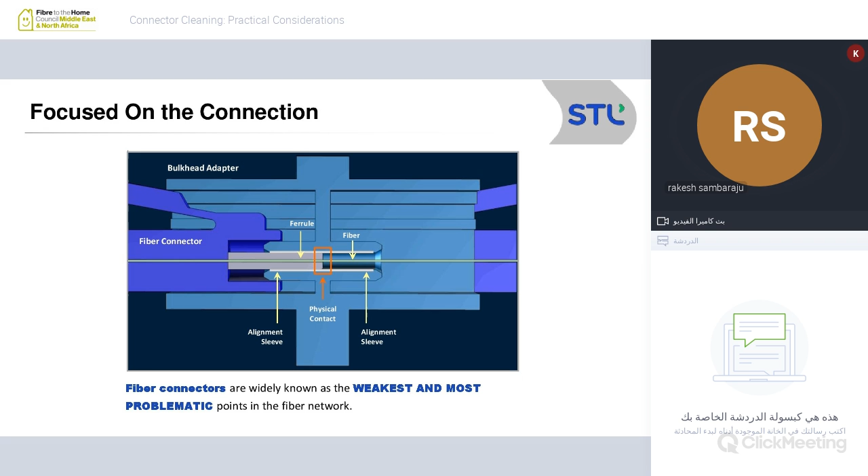The main component of the connector is the ferrule, which is what mates the other end of your connection point, right? So the ferrule is the tip of your fiber, and it mates into the connector, and that's where the physical contact between one fiber and the other fiber actually happens. Also, that is the weakest point in any fiber optic link, and it is very important that we make sure that particular physical contact is pristine and free of any contamination.

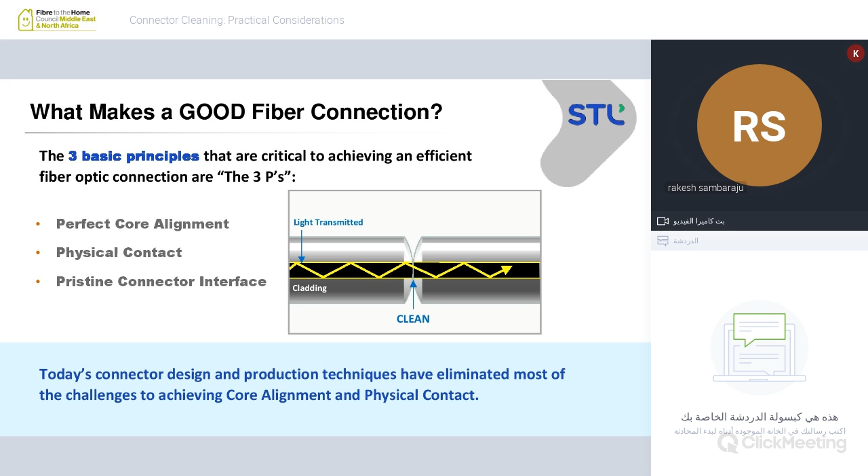So what exactly is a good fiber connection, right? What I call it, or even other people in the industry call it, the 3 Ps. We need a perfect core alignment, perfect physical contact, and a pristine connector interface, right? Previously, when we started making these connectors as an industry, there were some challenges in the core alignment. So that was the biggest problem that we were trying to solve. As the industry evolved and we are way advanced, the core alignment is not the main concern. The main concern is us human beings who are handling them and how we make sure these connectors are clean.

So what happens when a connector is not clean? Let's take an example where you have some dirt particles lodged in between these two connectors. One thing that can happen is you may not get a perfect connection. If the dirt particle is strong or solid, it may not completely align or touch. So you will have some insertion loss, which means your signal power goes down a bit.

The other bigger problem, I think, is the back reflection. When you have dirt in between, which potentially causes some misalignment, a small portion of the light that is supposed to transmit to the other end actually reflects back. That back reflection is a bigger issue in telecom networks, especially when you're closer to the active equipment.

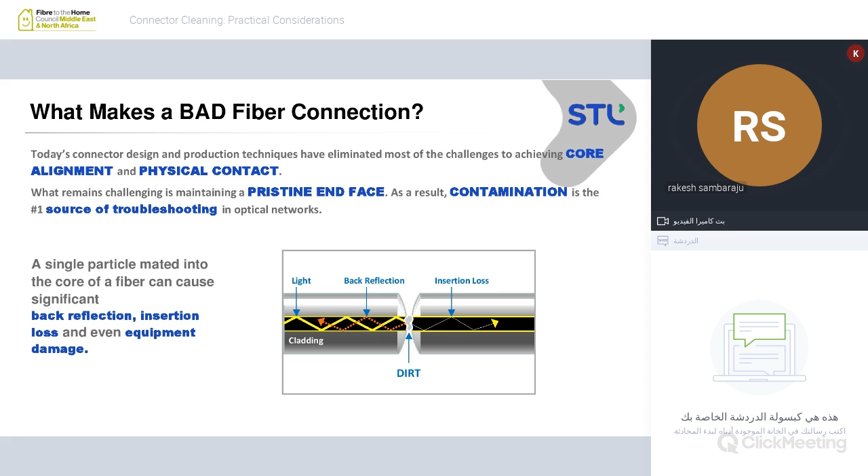What we also see from an enterprise network perspective, as you start using 100 gig and 400 gig technologies in your data centers, the signals become much more sensitive to back reflection. Maybe at 10 gig you're not that concerned, but at 100 or 400 gig, a tiny amount of back reflection may degrade your signals and cause network issues. So two issues with poor connection: one, insertion loss, which means a lossy connector, and two, back reflection, which need to be avoided.

So first, how do we know a connector is dirty? The best way to understand contamination on the connector is actually physically looking at it. There are many ways you can do that. The handheld device is the most common, at least the one I'm familiar with in my career. You just plug in the connector at the end and look on the other end. It's a microscope, technically. There are other ways. For example, a handheld device with a probe you can extend and put the connector in, so you don't have to use your hand and look into the microscope. Essentially, the optical way of determining how your end face is contaminated is the best way.

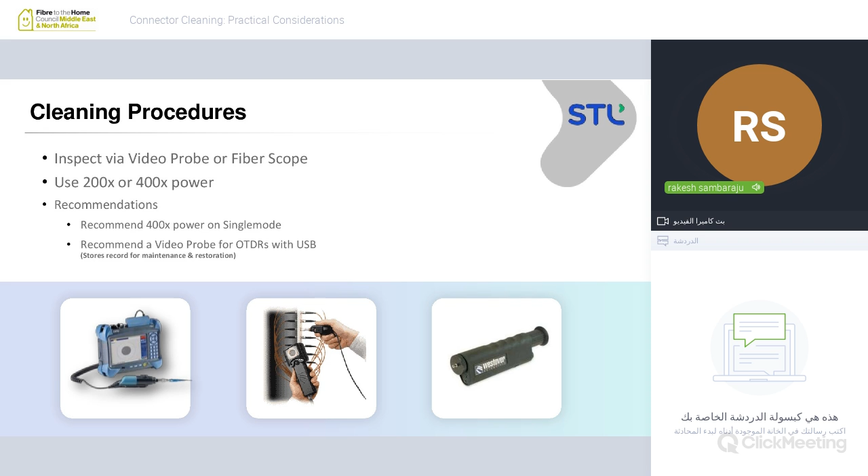And once you've inspected, our recommendation is at least 200x or 400x power. Mostly for single mode, which is about a 9 micron core, smaller compared to multi-mode fiber, 400 times magnification is recommended. So the procedure is: first you inspect, then you clean, then inspect again, and then plug into the network.

So let's look at some of the connector contaminations. There are many ways you can get contaminated. We talked about dust to begin with. The dust could be any size. For example, a 1 micrometer dust particle theoretically can cover up to 1% of light, which is 0.05 dB. A 9 micrometer speck is also too small to see without a microscope. So there can be different sizes of contamination that we need to worry about. Let's look at some of the things that can actually contaminate your connector.

Apart from dust, one of the other major contaminations is oil. Our fingers sometimes get oily, and if we are not careful, even if we slightly touch a connector end face, the oil from our skin can contaminate it. Film residues condense from vapor in the air. When the connector is mated, over time there may be some vapor deposition, condensation, that can cause contamination. When you're prepping a connector, the powder coating can come out. Sometimes, even after cleaning, residual drops of alcohol evaporate and leave some dust particles. So there are many ways your connector can get contaminated, and we've identified these as the main culprits.

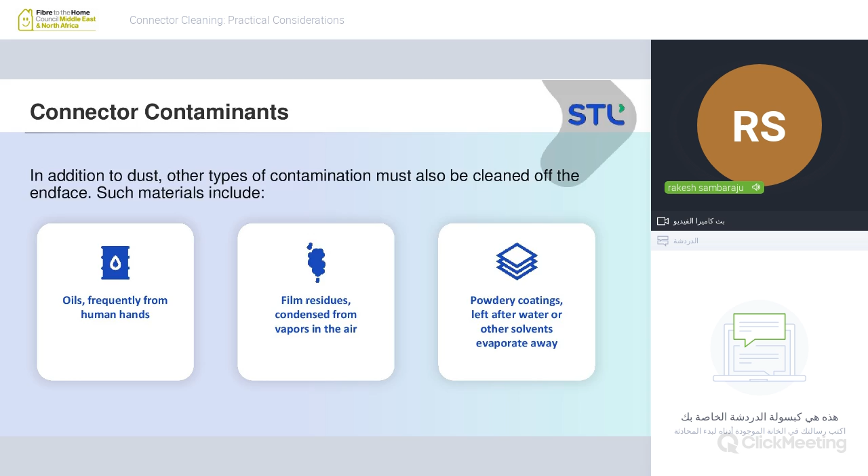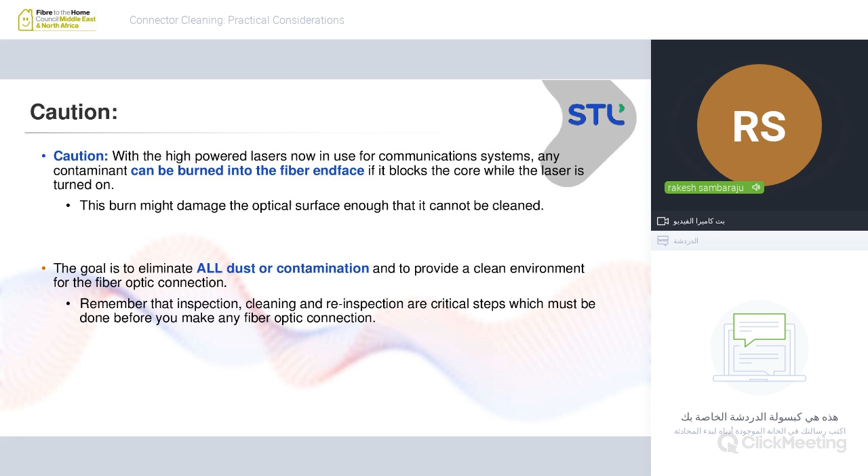I want to highlight the caution here, especially in telecom networks closer to the equipment. We use high-powered lasers. In long-haul transmission, or even at an amplifier stage, the power coming out of the connector is pretty high. So if that connector is not clean, even though the portion of light that reflects back is insignificant in ratio, if the incoming power is high, the reflected light could be significant enough to cause damage, either burning the connector end face, or going back to the active equipment and damaging it too. So especially when you're closer to the active equipment, it is very important to make sure the connectors are very, very clean.

So it is very important that any particle, even though it is small, is out of the connector face to make sure it does not damage the other one or expand and create more loss in your network.

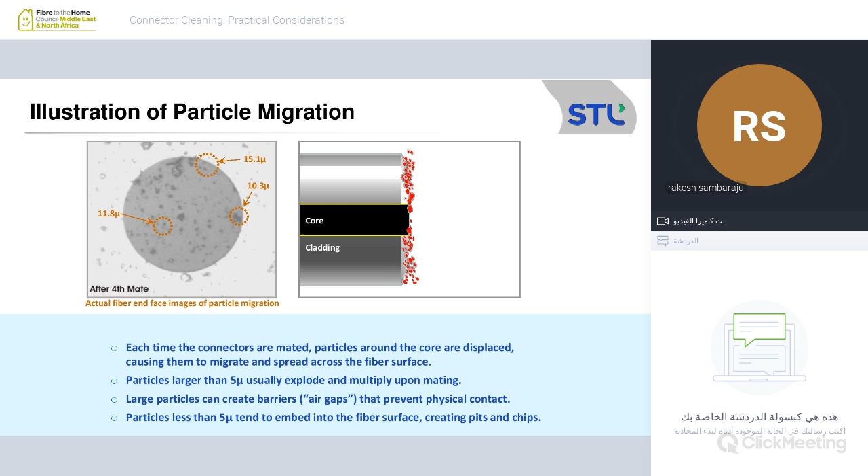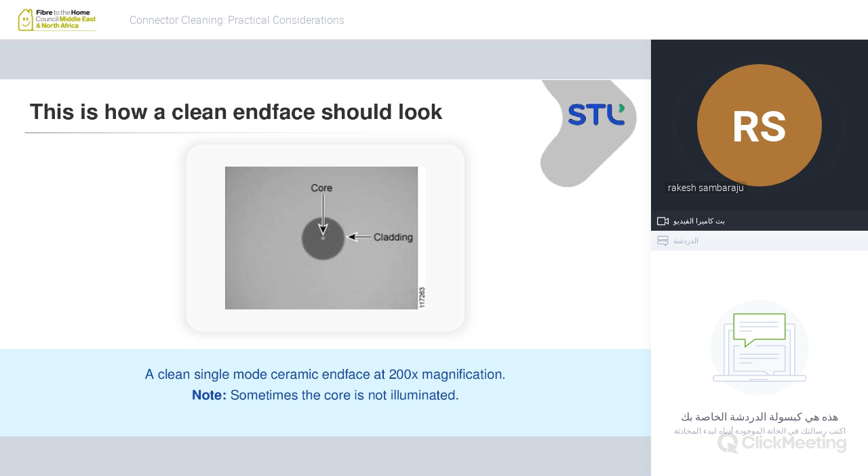So let's look at how a typical clean end face should look. Here is an example of an ideal end face seen through a 200x magnification. What you'll see is the core. Again, the core doesn't have to be illuminated all the time; it depends on what's on the other end. You may just see a very small dot or a very subtle distinction between the core and the cladding. So what you need to see is a very clear image without any obstruction on the end face. Ideally, that's how it would look.

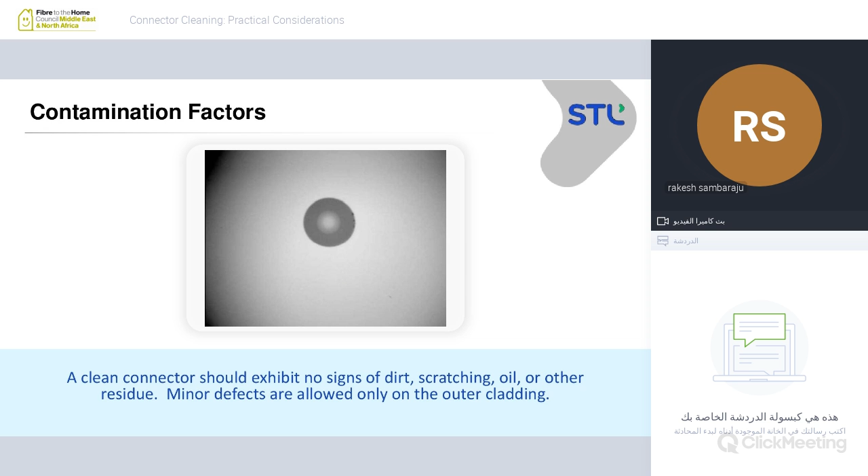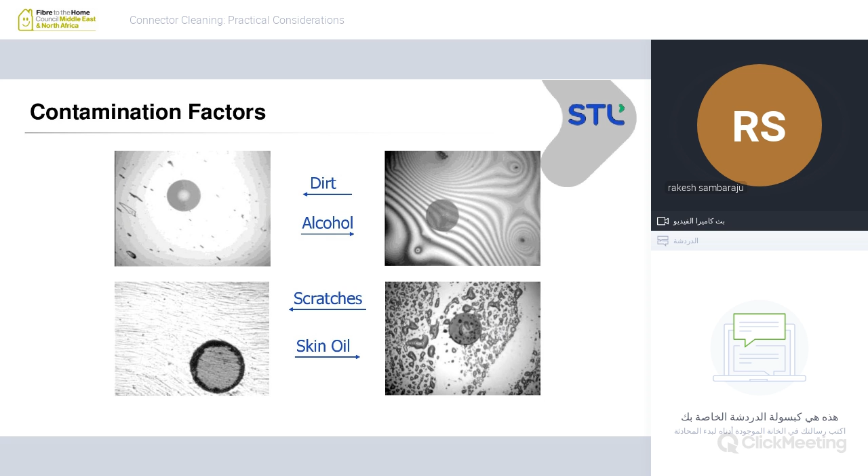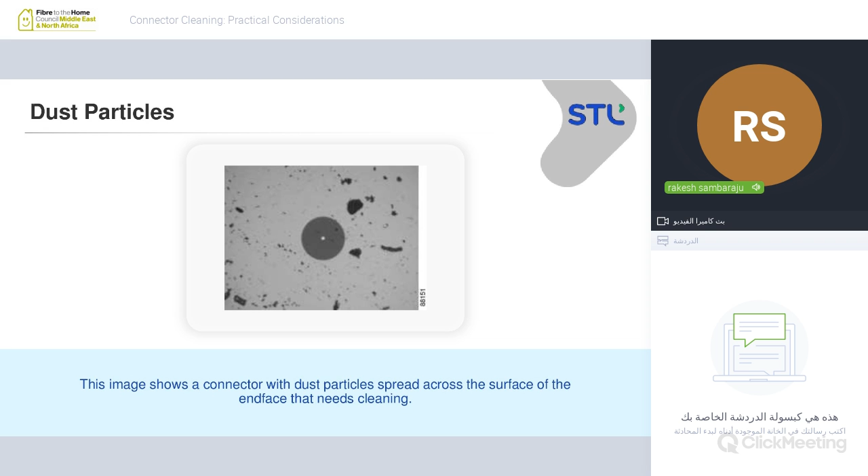So let's look at each one of those. This is a detailed view of a dust particle in the connector. If it is just solid dust, you would see lumps of contamination here and there, so it won't be a fluid view. This is what you should expect when it is only contaminated by dust.

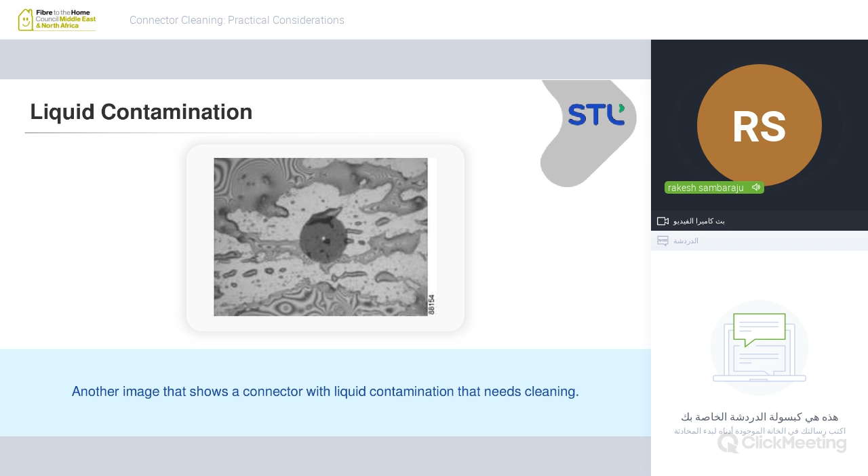Liquid contamination, again, is self-explanatory. What you can see here is an image of a connector with liquid on its end face. You see a continuous visual disturbance that represents something liquid actually blocking the end face of your connector. Again, it depends on how much liquid you have. This is another example where it looks like it was submerged in water; you can see a lot of liquid on the end face of the connector, and it clearly needs a thorough cleaning.

Different sizes. This is a small droplet. I think once you put it in the microscope, the droplet got distributed to the outside, but you can still see the very tiny amount of contamination is clearly visible and will impact your system performance.

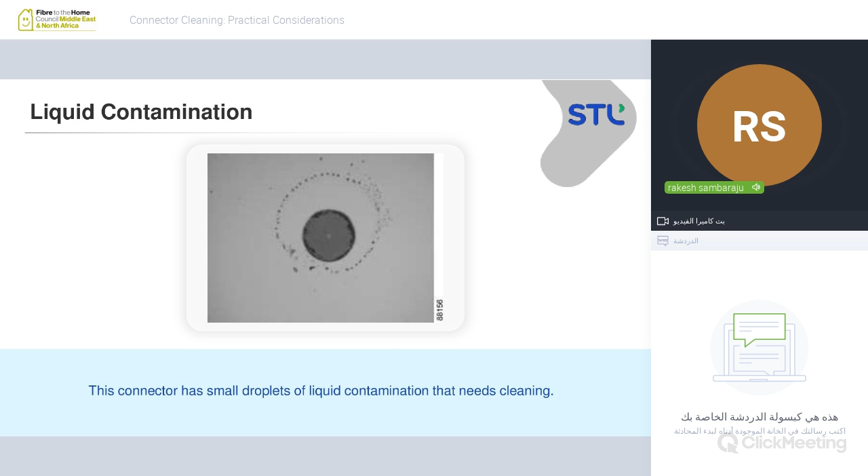So even though we think we've cleaned the connector, there are cases where improper cleaning or not using proper methods of cleaning can actually leave some residue. So a second inspection is sometimes not a bad idea.

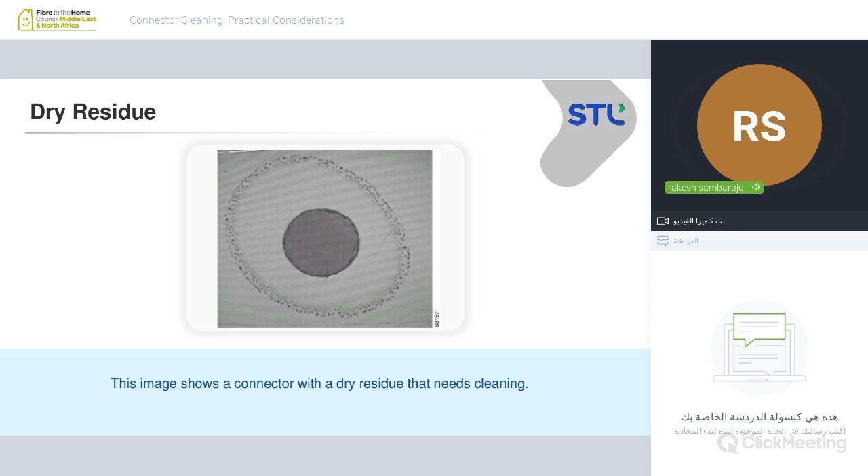Oil residue, similar story. Here we see an example of very little oil on the connector. But no matter how little the contamination is, it still needs cleaning because it would block some portion of the light.

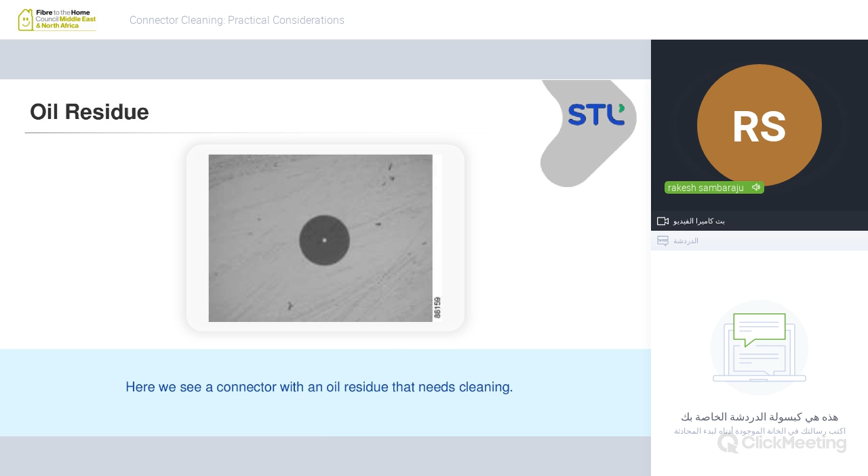Now, scratches. This is a good example of a connector with scratches. In this case you cannot clean a scratch off, and sometimes the scratches may be on the outer side of the cladding, which is fine. But when the scratches are closer to the core or even on the core, that tells you that you need to replace the connector. It also depends on the depth of the scratches.

Scratches can happen in many ways: poor handling of the connector, obviously, or trying to clean it off your shirt or with your fingers. I've seen those cases. So unfortunately, if the connector is really scratched, the best option moving forward is to replace that particular connector.

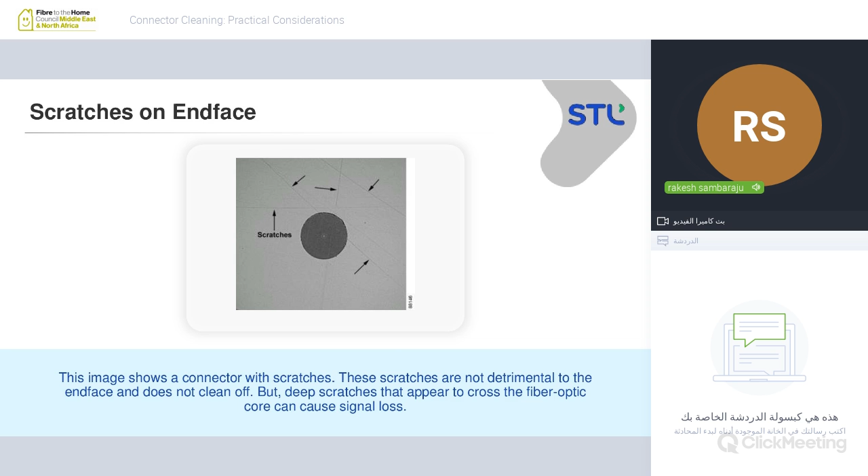Now, chipping is an issue too. So, for example, what you see here is a small chip on the outer edge of the cladding, right? Again, this is something we cannot clean, but inspection of the connector would point that there is chipping that has happened on the connector. Sometimes, if the chipping or any contamination is just on the outer edge of the cladding, for example, in this case, this is a very small chip at the outer edge, sometimes it can work. If optically the performance looks good, it should be fine. But for foolproof operation, our recommendation would be replace the connector.

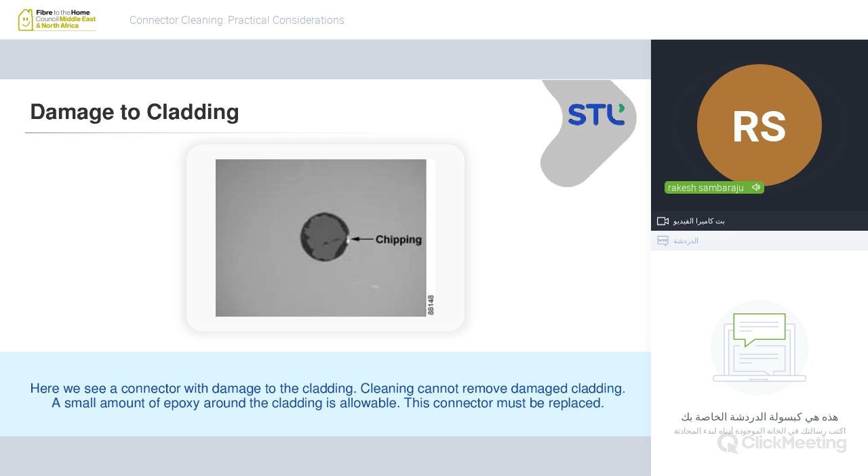So this is another one, which is an over-chamfered ferrule. Basically, there's nothing that could be done here. It's a damaged connector, and that must be replaced. So we also have to be cautious that we are mating the right connector to the right adapter, for example, or we're not using excessive force when we're plugging in or plugging out of those connectors. So physical damage to the connector is also part of the issue at hand sometimes.

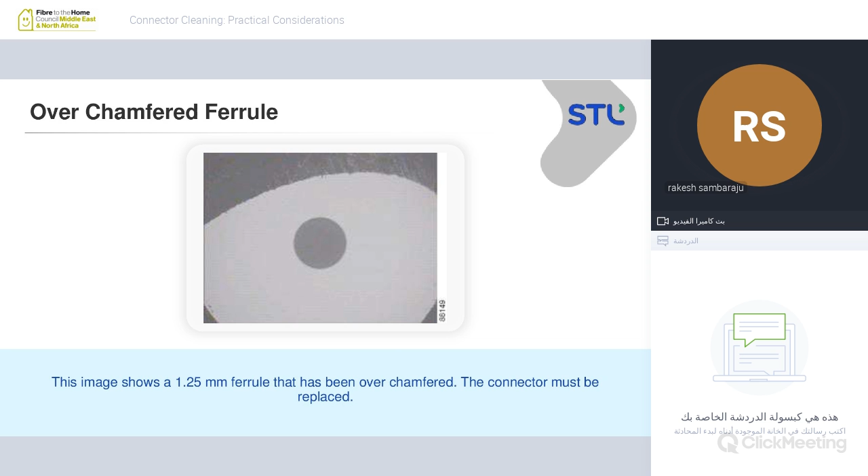So that's what we covered, the inspection piece, right? So once you inspect the connector, any different kind of contamination can happen. It could be dirt, and we've seen some images of how dirt-based contamination would look. We've also seen some cases of residual alcohol, where in good intention someone cleaned it, but did not make the effort of removing all the residual alcohol. That could be an issue. Connector breaking could be an issue, right? So that is covered under inspection, and why inspection is very important.

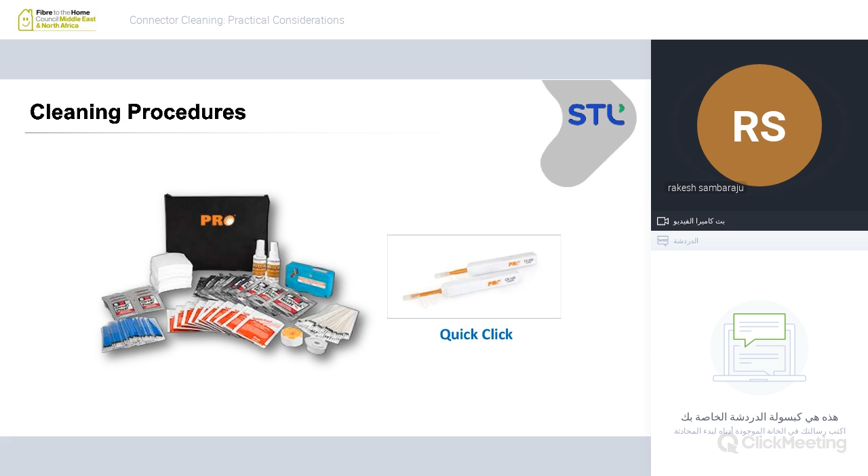Now let's look at some of the cleaning products that are available here. So the process here, I'm not going to run through the whole thing, but it's very simple logic, right? Before you start doing anything with the connector, you plug it into an end face scope to see if it's clean or not. If the end face looks clean, free of contamination, if it does not look like any of the 10-15 images that we've seen in the last 5 minutes, you're good to go. Plug the connector, life is happy, right?

But if it is not, then the first step would be a dry clean. Just clean with a lint-free wipe, and it should be able to clean any residual dirt that's left. Recommendation is double check again, make another inspection. If it's clean, let's plug it in. If it's not, let's give it another try. But if with your dry clean method the connector's end face is not getting clean, then you need to use the wet wipe, a wet clean method, alcohol-based mostly. Inspect again. If it is clean, fine, put that in. If not, clean it a few times and plug it in.

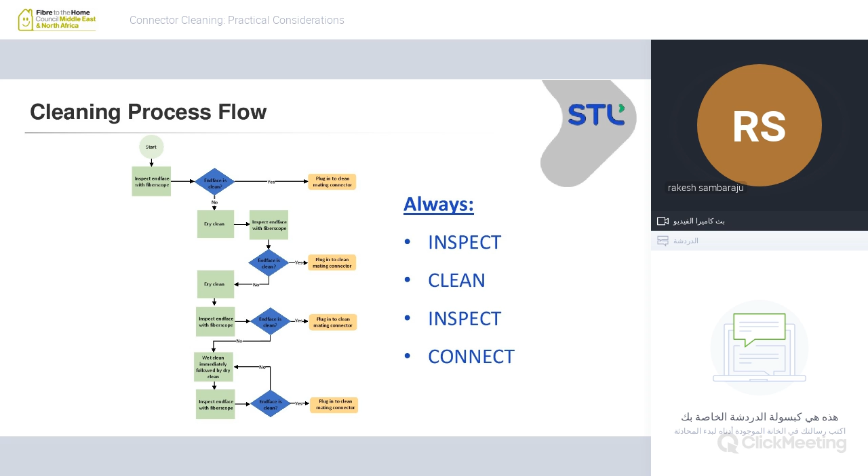If after cleaning many times you still see some contamination on that, it's most likely a scratch or a chip in the connector, right? That's when you know you need to replace. So always inspect, clean, inspect, and connect. These are the 4 guiding principles behind plugging a connector.

So there are various tools available in cleaning. I think you all are well aware of what they are. The most common method is isopropyl alcohol, 99%. It has to be. Anything less is not the best cleaning agent for a connector. Then you also have wipes. You have some other chemicals. So ideally, in our toolkit, what we need is alcohol, wipes, a scope to visualize things, and other cleaning tools.

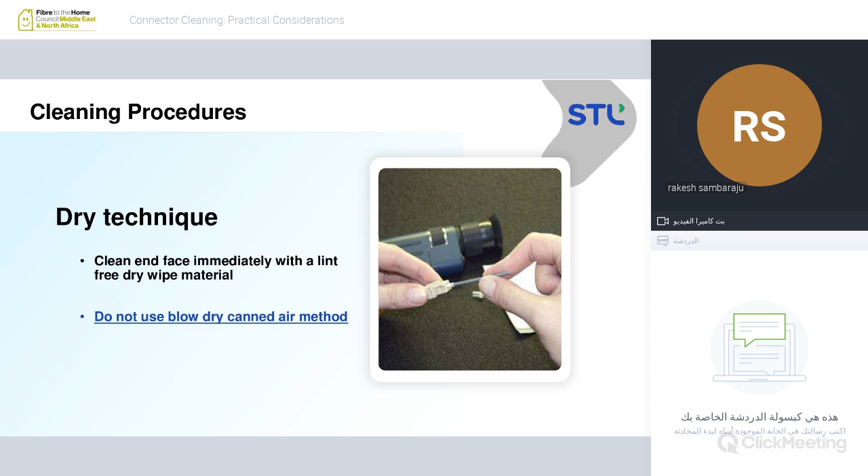So, for example, for dry cleaning, there are lint-free wipes. There are also swabs that you can use to clean the end face of the connector. What we suggest, and I think it's a well-known fact, is do not use any dry air. For example, I use dry air to clean my keyboard once in a while. That's not a good method to clean a connector because it can actually blow dust particles onto the connector, right? So the best method is wiping; alcohol or dry, in this case, would work.

Now on the wet cleaning methods, Kimwipes and 99% isopropyl are probably the foolproof things. And alco wipes is another solution that's about 90%. There is the NOYES cleaning connector, for example. On the dry side, the standard ones are the CLETOP solutions and the Chemtronics cube cleaner. Those come in very handy when you want to do a dry clean.

There are cases where you can't really access the end face of the connector, right? So all you can do is access it through the other end of the adapter. So cleaning sticks come in handy where you clean the back end of the connector from the front of the adapter panel. So cleaning sticks are pretty good. Cleaning fluid, you can buy the can, so you can spray some liquid in it and then clean with the dry stick. So that's the best way of cleaning a connector where you can't really access the ferrule.

So some of the tips when you're cleaning with alcohol, right? The first step is never leave any alcohol on the connector, but even if you think there is some, don't let it dry, because once the alcohol evaporates, it leaves some kind of residue. And once that residue is left, it becomes very hard sometimes to clean. So it has to be cleaned at the initiation of this.

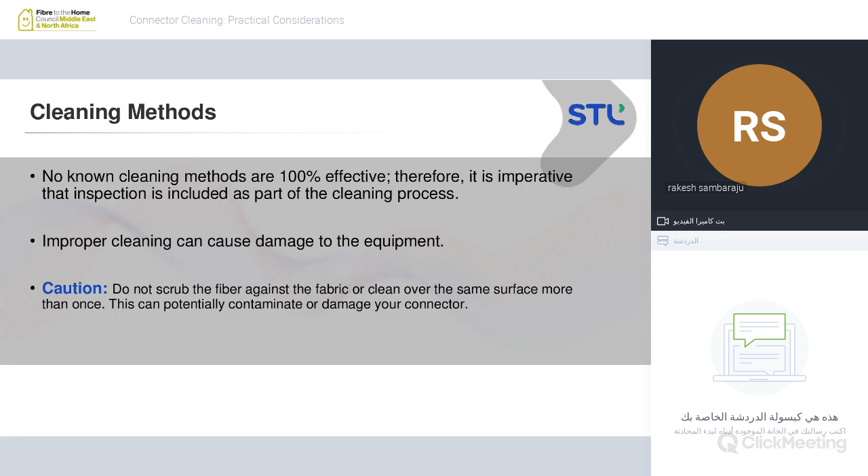Storage of cleaning products. It is important how we store them. For example, if you don't properly seal the containers, some of the cleaning agent can dry and either stay on the wipe or on the lid, etc. So we have to make sure that all the cleaning products are well sealed. Dust can collect on top of that. Sometimes we ignore that part. I'm talking about myself mostly here. But cleaning is as important as making sure that the products that are cleaning these connectors are well maintained and stored.

So let's look at some of the nevers, right? Even though never say never, there are a few things we should never do. So never use alcohol or a wet cleaning wipe without making sure that you're not going to leave any residue on the end face, right? That could mean knowing exactly how much alcohol to use or how many times you have to swipe, or using a dry mechanism right after using a wet mechanism to clean it.